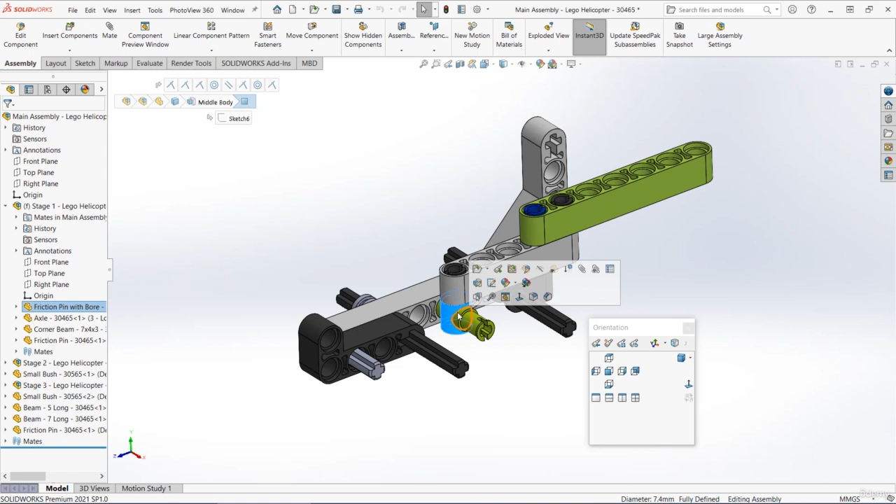You can either open it by clicking on the file directly, or you can go to the assembly, click on the part in the graphics area and press open part. Now we basically want to make this exact same pin, but we only want one of these arms coming off it. We don't want both of them. So we could just keep this one and then cut one side off. But it's probably a little bit less messy to adjust the original features.

First, let's save this part as a copy. So from within this part, let's go to File, Save As. Let's choose Save As Copy and Open. So make sure you have Save As Copy and Open selected down here. And let's rename the part. Let's call it something like one-sided friction pin with bore and press Save. I'm going to close the original part and then make some small changes to this part.

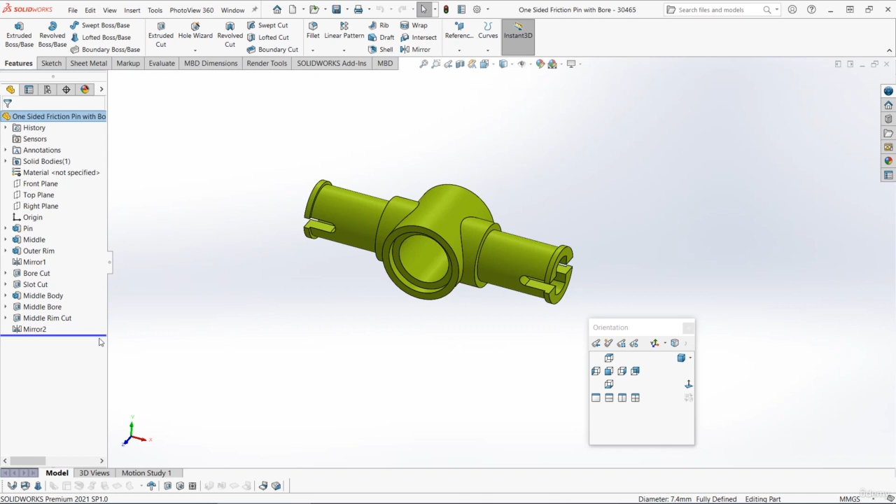So if you remember, when we made this pin, first we made that long center section. And we did this using mid-plane extrudes. So we need to just modify that original center section, so instead of going out in both directions, it only goes in one direction. To start off with this, let's edit that first feature, the pin feature. Firstly, we don't need to go in both directions, so instead of a mid-plane, we can change it to blind. And also, we only need to extrude half of that original distance. Originally, it was 22.7, so we just need to half that.

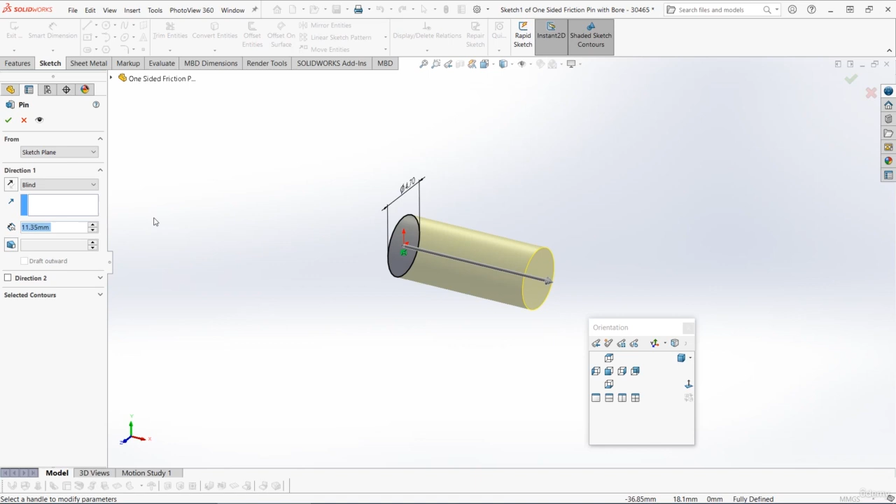If you're not too hot on maths, an easy way to divide this by 2 is to just click in the box and then after the number, just put /2 and then press enter. This will divide that number by 2. So that's now being divided by 2. It's 11.35 without us having to do any of the maths. Then let's press OK to accept that feature.

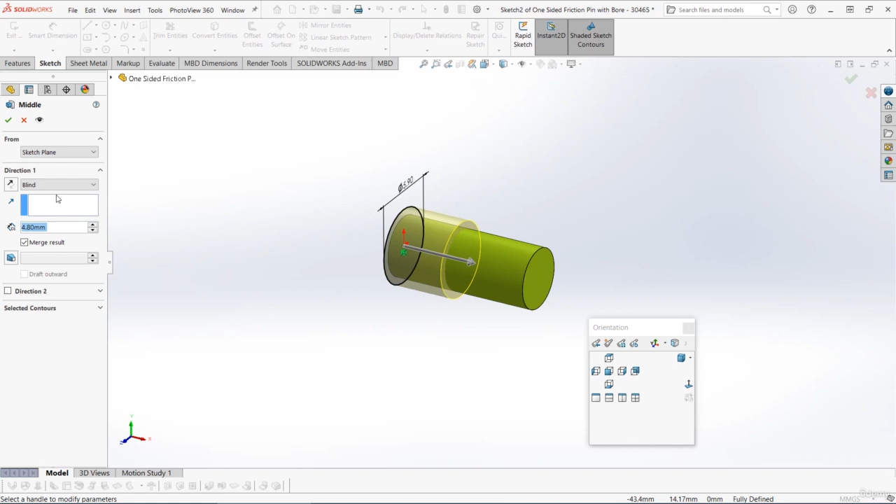And let's do the same for the next feature. So I'm going to edit this middle feature. I'm going to change it from a mid-plane to a blind extrude. So this means we're only extruding in one single direction. And then I'm also going to half the amount that we're extruding. So I'm going to click after the number in the box. I'm going to put /2 and press enter. And that will divide that number by 2. And then I'm going to press OK to accept that feature.

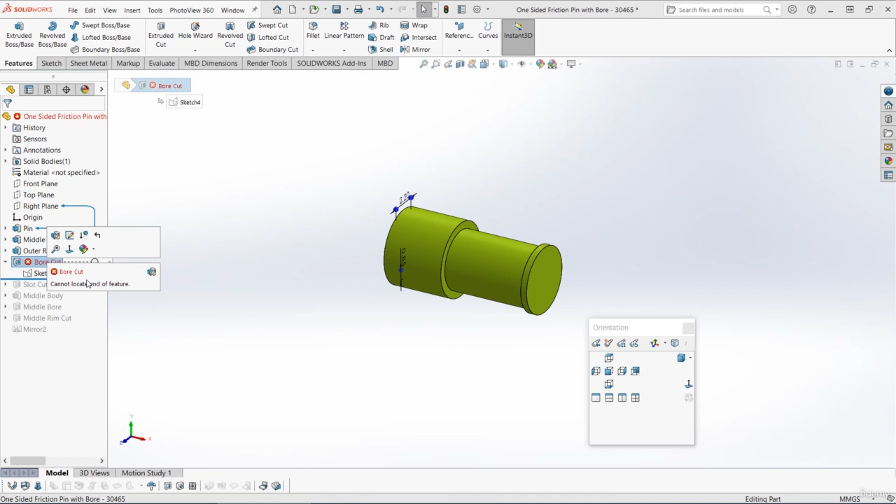Then let's drag down again. We've got the same outer rim, so we can just leave that. Then if we drag down again, the mirror feature's got an error on it. But we don't actually need this mirror feature because we've only got one side. So we can completely delete that. Next, let's drag down again to add the bore cut. And with this, you might find that you get an error. If we click on that feature, we can see the error says, cannot locate the end of the feature. So let's edit that feature and see exactly what the problem is.

Now the problem is we're trying to cut through all both ways. But the sketch is actually right on the end of the part already, so there's nothing for it to cut on the left-hand side. So SolidWorks is getting a bit mixed up here. To fix this, let's just uncheck this direction 2 box. So now we're just cutting through all in one single direction. You might need to flip the direction by clicking the reverse direction box here. And now we can see the preview's working correctly. We're going through all the model in the correct direction. So you can press OK to make that cut.

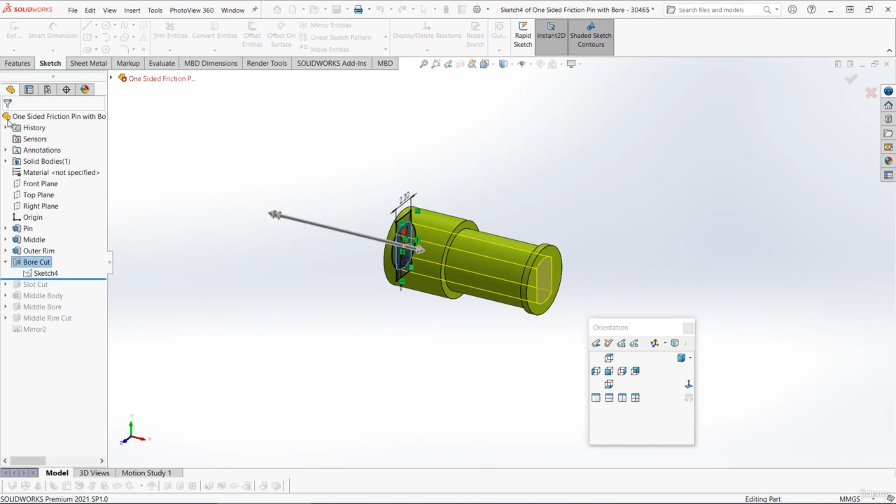Let's drag down again below the next feature, and the slot cut has been created properly. If we actually look at the sketch underneath, we've still got that slot on the left-hand side, but because there's nothing there, it doesn't really matter that there's nothing to cut there. So we can just leave that as it is.

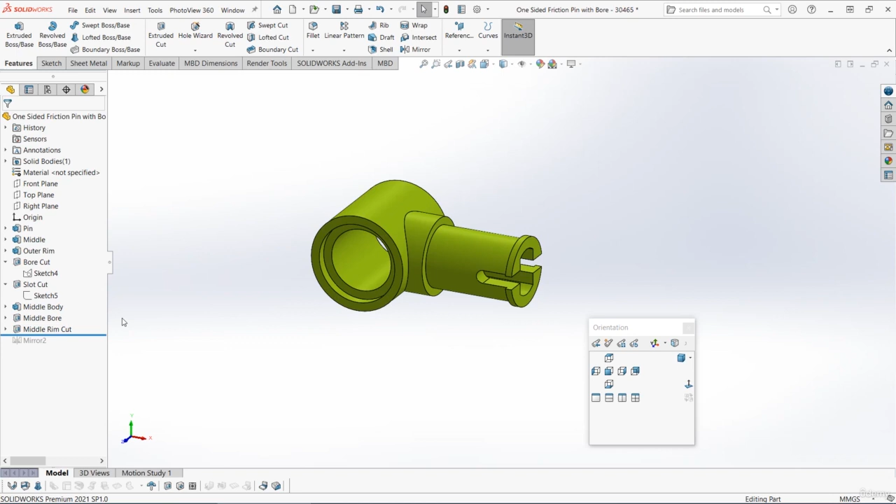Next, we can drag down again. So there we've got the middle body. We can go down again, and then we've got the hole or the bore through the middle. Then for the next one, we've got that outer rim cut. And then for the final one, the mirror, we've mirrored that rim cut onto the other side. So that's that part complete, and it's already the correct color, so we can just save that. In the next video, we'll be putting this part into stage 5 of the assembly.